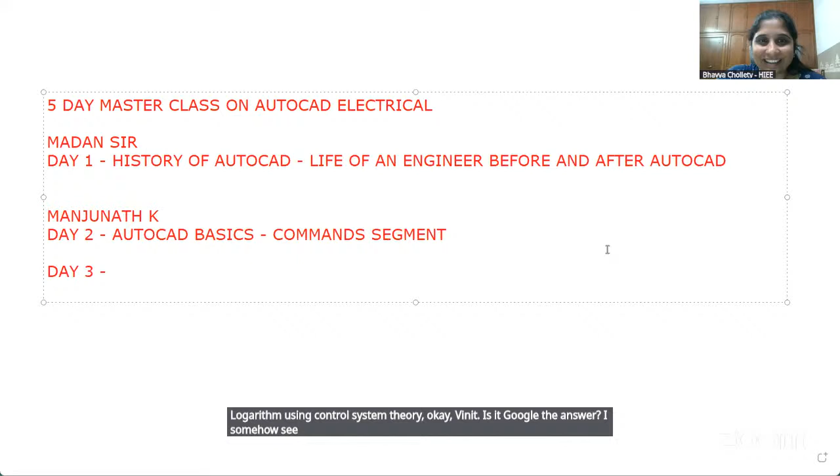Logarithm used in control system theory. Okay Vinith, is it a Googled answer? I somehow see it like that. Is it, Vinod, Yuvraj, is it? You can accept, no worries. Good, good, thanks for your honesty, Yuvraj.

Okay Yuvraj, good, a simplified symbolical representation of an electrical power system is SLD. Okay, Shabana says block diagrams are used to understand systems. Great, okay, great, right, super guys.

I'm getting a repeated answer from this. Okay, you try to get an answer from Google also, maybe Google will also give you a similar set of answers. Okay, Akash says it's a flow. Which is called flow, Akash. Vaishnavi says it also uses schematic for our practical manuals.

Okay, after we understood what SLD is and what a schematic is, we still have that confusion. So we'll try to understand how SLD is different from a schematic, how block diagram is different from SLD, and all those segments. In electrical, we will not generally refer to block diagrams, guys.

We will always try to talk in terms of SLDs, schematics, key line drawings, or layouts. Majorly we talk about this terminology in most electrical aspects. We will not purely talk about block diagrams. As somebody said, it's used in control system theory, yes. But to define the flow of the system, we use a block diagram, like for a power plant.

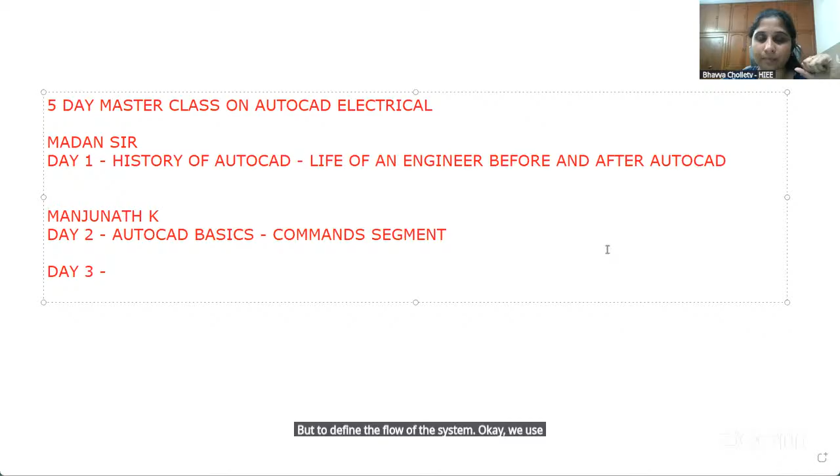Single line drawing, as most of you said, is surely meant to represent the respective electrical power system 100% using symbols. We notate each equipment with a certain symbol, and then that symbol along with specifications—meaning the rating of the equipment. We will not even miss a minute piece of equipment in the SLD, we make sure it is given, even the smallest terminal is considered in the SLD, guys.

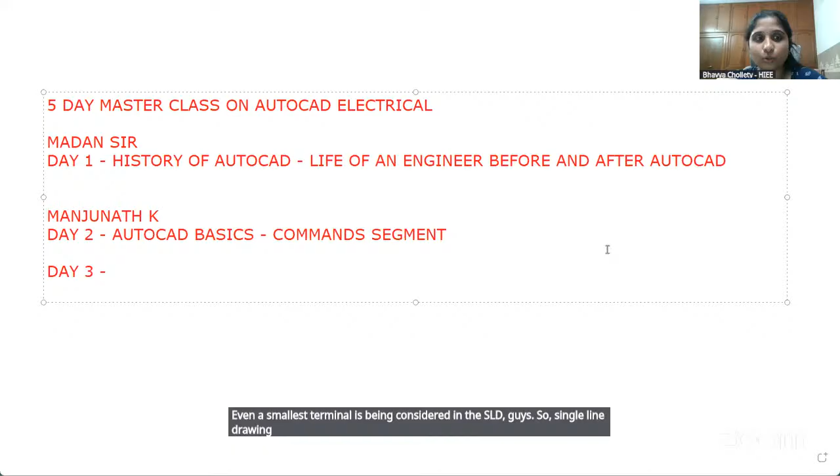So single line drawing is something where you look into it and understand how the system's power flow is being considered, from top or from bottom. And then you also look into the segment where you understand each and every equipment's rating individually. That is single line drawing. So I just defined it for you.

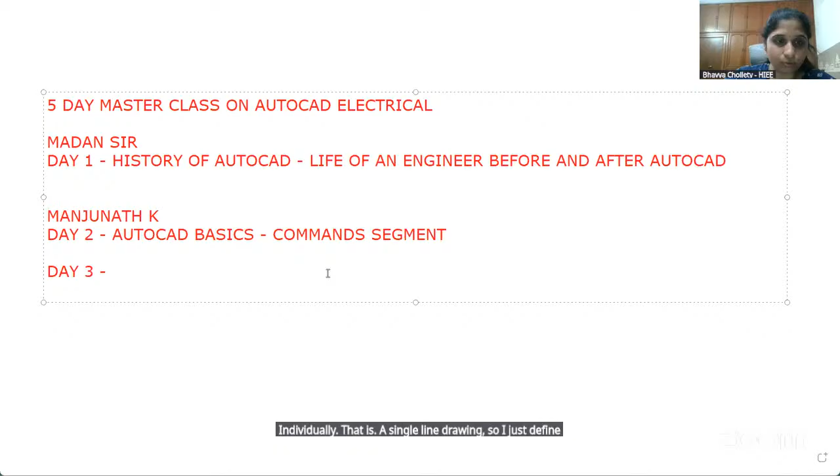So on the second day, we learned the single line drawing of a solar power plant of 200 kilowatt peak. And if you've observed the SLD already shared in the WhatsApp group that most of you have joined, you see that beside each equipment we write the cable designations, we write the inverter rating, we write the module rating, okay.

We try and write each circuit breaker's rating. In SLD, every equipment has its own rating, guys. So I define single line drawing: if you haven't mentioned the respective ratings of the equipment in the SLD, then it will not be a complete SLD. SLD is always complete only when you have considered the respective ratings of the equipment used or about to be used in the respective system.

Coming to your solar PV plant designing, if you have seen the power flow from the module till the evacuation, from the inverter till the connection to the grid point, the connectivity was shown by Manjunath. I think we all learned a great thing from it, talking about the symmetry.

In our first class, we tried to make you understand how AutoCAD is used, by drawing simple alphabets, because we already know how to draw an alphabet. Drawing the same thing in AutoCAD gives you a clear picture of how AutoCAD is processed and understood to draw elements we already know.

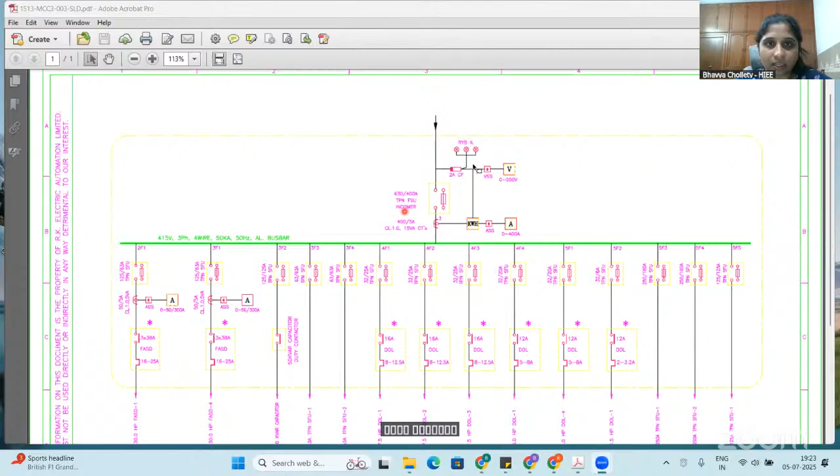So we are seeing a simple SLD, guys, where we'll understand how the system will be there. Now you can see there is an arrow mark on the top referring that the power flow is from top, and the connection is coming from top.

We will just see some SLDs with respect to my perspective, because I believe electrical engineering is perspective engineering. My current definition could be with respect to Ohm's law, your current definition could be with respect to charge, somebody's with respect to voltage, somebody's with respect to resistance. So it could differ in various ways and the fundamental is the same. I just wanted to tell you this because my session now is going to talk purely about schematics, and it is really at a high level.

I saw that most of you are pursuing candidates who have no idea about switchgear, or the connections of the equipment, or how the elements are being designed or equipment considered. So considering that criteria, I wanted to show you some basic fundamentals which Manjunath has already taught you at a good level.

I hope everybody is able to see the spotlight on my screen. So now we will see how the spotlight is being considered. Let us see, I have a bottom arrow and your respective supply is coming down, and then you can see there is an incomer FSU, TPN fuse unit, switch fuse unit, of 630 or 400 amperes, and then you can see there are indication lamps which are called ILS indication lamps - red, yellow, blue.

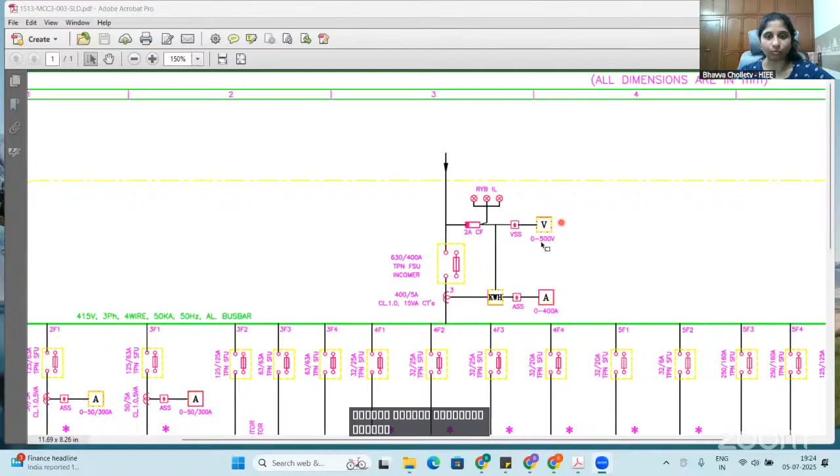Coming down, the supply that you're seeing here, the incoming supply, is being measured and also protected, guys. Every respective system in your houses will also have a breaker at first. So what we are doing is trying to understand how the system will be considered, and how these are being taken into criteria.

So you can see that the supply coming here is taking an input, and the input supply is first measured. In case there is a higher value, automatically this breaker will get tripped and the supply will not be given to the respective bus here. So before it goes to the bus, or to the supply of the equipment connectivity, you can see there is a CT and the respective power along with the current.

Both the kilowatt hour meter and power meter, which you call an energy meter - you look into it, where your current as well as your voltage are being measured. Both of them are measured and checked simultaneously to understand how much input is coming into your system. Now if you see it, there is a system here wherein you can see there is 415 volts, three phase, four wire, and 50 kA is the short circuit capacity.

50 hertz is a frequency. Aluminium bus bar is your respective bus bar. Okay, they have used an aluminium bus bar there. Now you can see that there are various loads connected. These are called feeders in general terminology, or you call them load. Now we generally draw a simple arrow mark that represents this like this.

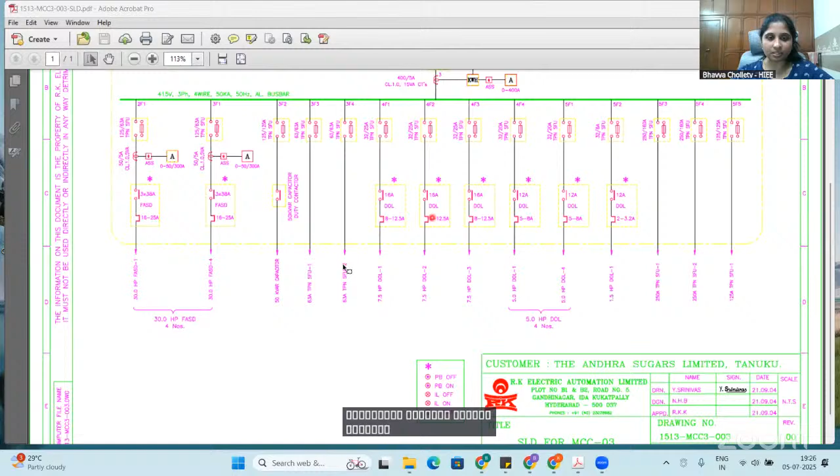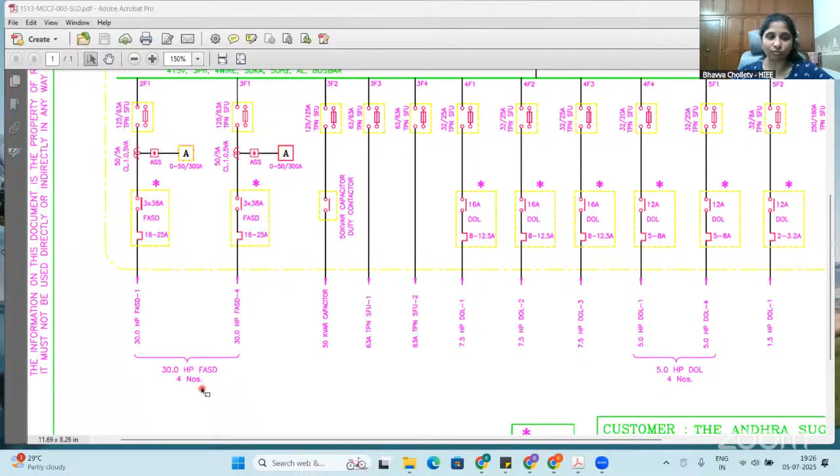So now when I'm looking into this, here you see that I have a supply given, and there are fully automated star delta starters, which you can see here, of 30 HP motors, 1 to 4. We have four numbers of fully automated starters. FASD represents fully automated star delta starters.

There are starters. Do you know what is a starter, guys? What is a starter?

What is between the energy meter? Those are voltage selector switch, Yuvraj. We call it a voltage selector switch and ampere selector switches, where we try to understand how these are connected.

Okay, I got an answer from Sai Krishna Maganti saying that a starter is used to limit the starting current. Why do you get this high inrush current, or what is meant by this limiting of starting current, guys? How do you define this?

To control the starting current. Yeah, but why should we control the starting current? Somebody answered with a point about 2 point starter and 3 point starter, very nice.

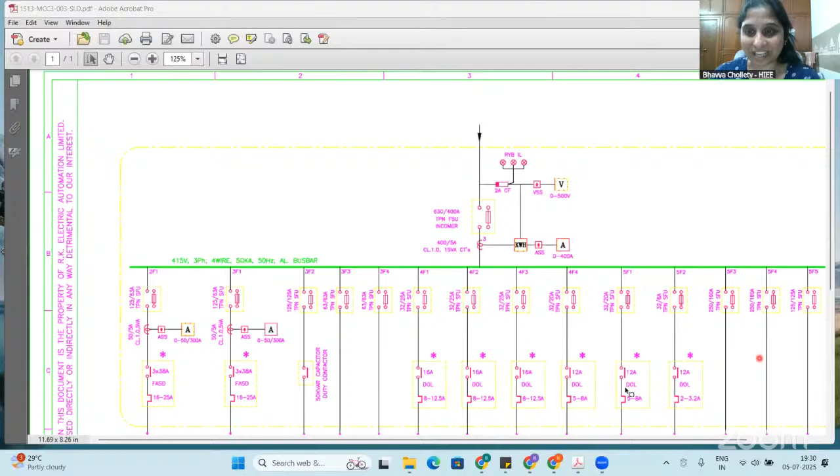As soon as you're on the bed and you got an alarm, and you woke up, how much time do you take to get up from the bed, put your leg down, sorry Pravin. 5 to 10 minutes, so very less time, yeah. 10 to 15 minutes, okay. Kritika says 5 minutes, maybe 10 minutes, okay. Good, so good, Snehit, I accept your point according to the usage of mobile, okay.

Now, the moment you wake up, just wake up from your sleep, not from your bed. No, you're not getting up from it, okay, sleep once again, okay. Good, Abhilash. Nice habit, okay. So now when you look into this, what is happening there?

You try to get up from the bed. The moment you're trying to give that energy to your body to wake up from sleep position to sitting position, you take the support of your hands or you get up from your bed. What is happening? Your body should pump in some more little energy to your body to get up.

You sit down and then after 1 hour you're trying to get up. Okay, your body is in one state, which is called a state of inertia. Inertia could be not only with respect to weight, it could be with respect to the state of the equipment.

Now your body is turned off, sorry, during sleep, and your motor is switched off when it is not in use. Suddenly when you start a motor, it should get that energy to actually run at a normal speed. Guys, you're all with me?

Lack of energy is inertia, to some extent, not completely, right? So now what is happening? People who didn't understand what is inertia and why motors have high starting current - I'm just trying to answer that simple question, guys. Why we require starters connects to that question, okay? So it's a tendency to change its motion. Correct, Prem, you're right. So what is happening?

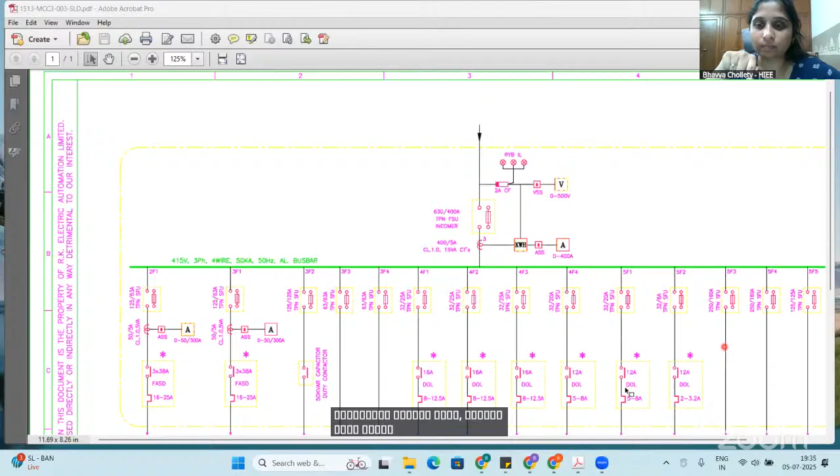Now the best example to understand the DOL starter is your pump motor in the house. Have you seen your pump motor? You will see one red button and one green button in the house. The bore pump motor that you see for water pumping from the groundwater - you'll have two push buttons. Those are called push buttons, the red and green ones. The green one is for on and the red one is to off. Correct? So that is basically a simple DOL starter, guys.

Very, very simple DOL starter. You can see here there's a push button and a DOL starter along with an OLR. This symbol represents an OLR in other standards. What Manjunath has shown you as part of OLR had two respective circles like this, as in switch opening and closing - that's an overload case. And now here, whatever you're seeing is just a rectangular, semi-rectangular wave like that.

So that case, this is also an OLR here, which you see where my spotlight is actually moving. You can see this is a 16 amp push button, and there's a fuse unit here. And then you can see it is being given to a DOL1. So likewise, this SLD is purely to supply, and it's a panel that is being given.

This is basically a simple panel SLD that you're observing here, which is a starter panel. You can see that I have four fully automated star delta starters and one capacitor bank of 50 kVAR, and then some SFU units used for supply considerations. And if you want to take some supply from the power, you can take it from these units.

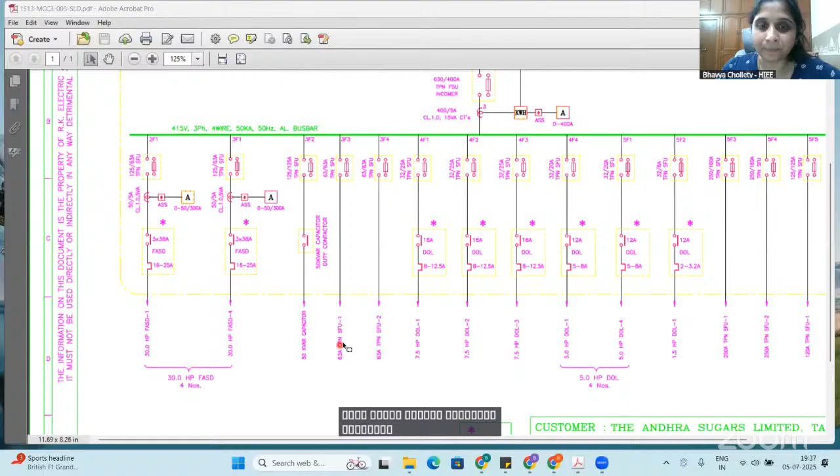And then you have your two, 1, 2, 3, 4, 5 different starters. We have again SFU units of this, 1, 2, 3, 4, 5. So I see 3 plus 4, 7, 8 DOL starters, 4 star delta starters, 1 capacitor bank, and 5 SFU units. Now this is a simple reading of an SLD, guys, wherein you can see each and every equipment has its current rating.

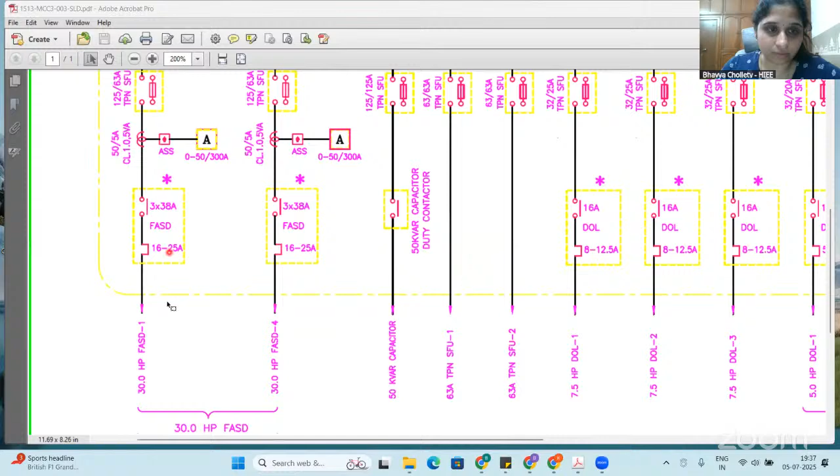125 by 63 amps, 50 by 5 amps, okay, 50 up to 300 amperes. You have a push button, you have a star delta starter, and then a capacitor bank. You see that every SLD will be mentioned with respect to the ratings. This is how the SLD is being mentioned. Now that was told on your day 3.

Okay, yes, and then we have let's go to something called a schematic.

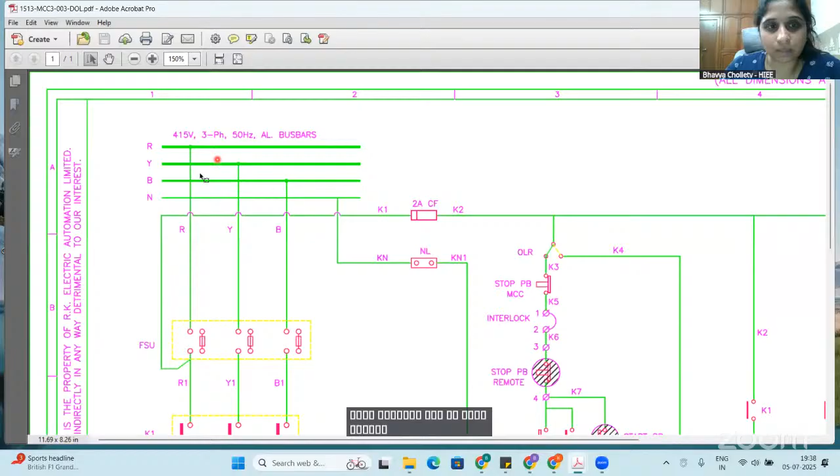So that's a DOL starter schematic, guys. You can see that here I have a four wire system, which is RYB neutral - I mean 3 phases, red, yellow, blue, and the neutral. So it's a 415 3-phase supply, but the system is a 4 wire system. And then from here, what you're doing is trying to take an input supply.

Guys, you're all with me? I'm trying to explain you a basic industry used DOL starter. Yeah, yes, great, good, super.

Thank you. Right, so now we are seeing that we have a fuse switch unit. FSU represents fuse switch unit, where you can see you will have a fuse connected.

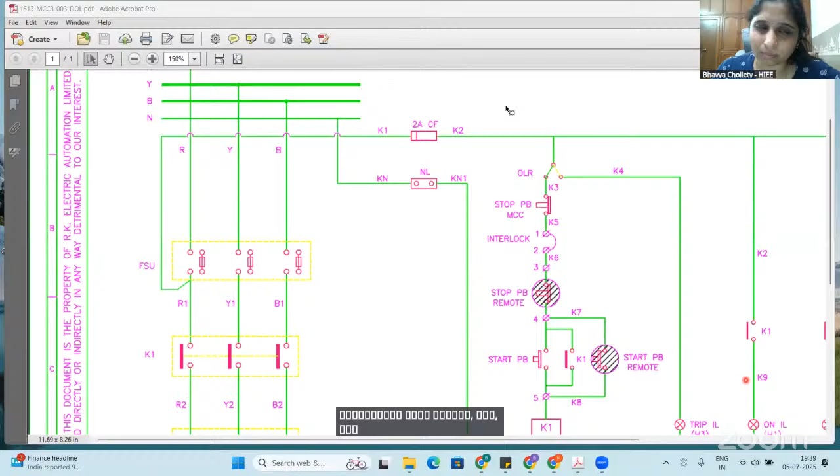We see most of it in movies where the villain tries to take off in serials. I would say the villain tries to take off the fuse out of the switch unit and the power goes off during any of the climax scenes and all. Then again the hero goes and puts it on, or somebody does that. I'm just giving you a good example where you can understand what is a switch fuse unit, guys. Yes, switch fuse unit, yeah, right.

Next we have a K1, which is a contactor, guys, and then we have an OLR, overload relay, right? And then we see one, two, three - these are terminals, guys, that are being connected to the motor. And here you see the motor terminals also.

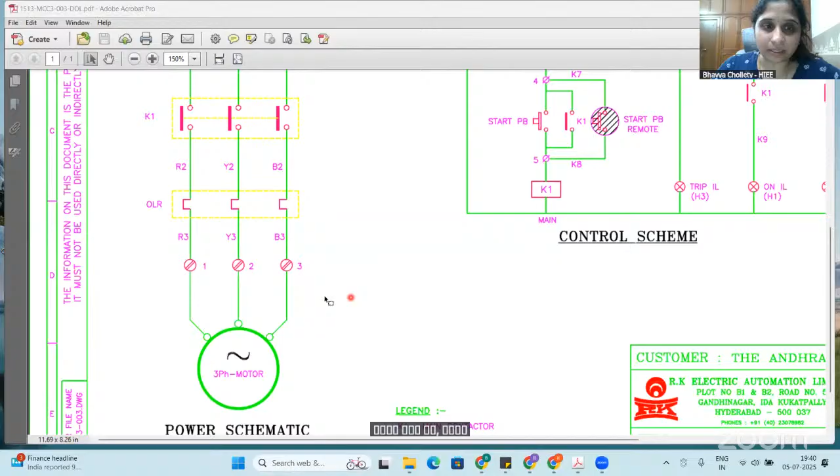We have given a power schematic. This is called the power circuit, power schematic of the respective connectivity, coming to this contactor. And then when you're looking into it, you can see that there is another supply given to the system, which is called the control schematic. You see this left part, I'll just put a rectangular box to understand - this part, the red box which I've just drawn, is purely the power schematic, guys. It is the power schematic.

And then the right part, which you're seeing here, is called the control schematic. It is power circuit and control circuit, right? So in the schematic, we'll have power schematic and the control scheme.

The control scheme is fully operated with respect to either single phase supply with respect to 230 volts. In some cases it will be 110 volts, which we take as another part, or sometimes it could be DC supply also for the control schematic.

Mostly it will be single phase supply taken from the main supply. As you can see from the respective supply here, I'm using my spotlight again. You can see my red arrow mark. From here, it is connected like this, and you can see that the supply is being given from one of the phases and the neutral.

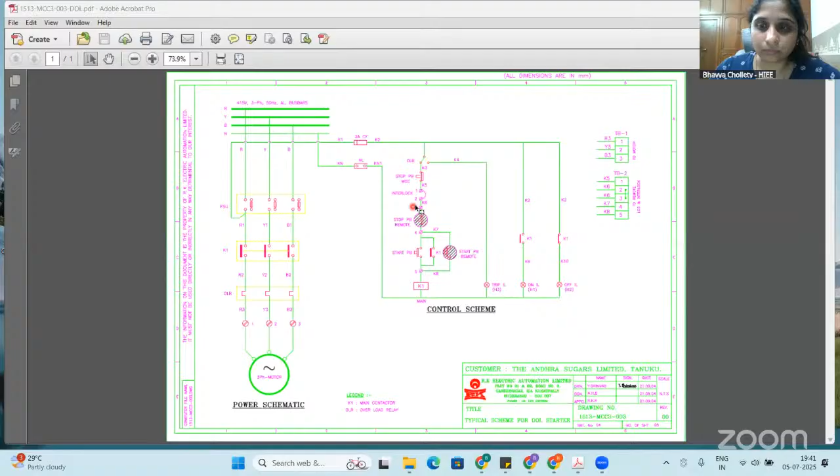Okay, whenever there is a consideration, right? Guys, are you all able to hear me? Is it Sagar's issue, and is everybody not able to hear?

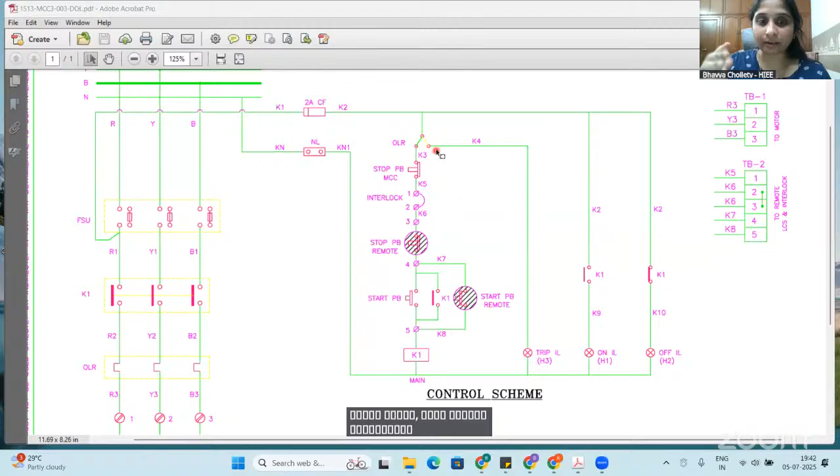Correct, Yuvraj, it is a single. Now in this case, it is not single pole double throw. Here the OLR will switch depending upon the current rating. Overload relay will sense, relay is something which senses the current.

So in that case, what happens? Your respective relay will sense the current, and if it is beyond the limit of whatever it is being rated, then your respective overload relay will trip directly. You can see the trip indication lamp.

Right, two-way switch. Right, Femina. And then we have the stop push button, which is NC, normally closed, because to supply the power flow.

So what I'll do is use an arrow mark to make you people understand in a better way, guys. From here, the supply comes in. It is going, and I see that there is no overload current, so the current is flowing like this. And then I see there is a stop push button that is connected, so the supply goes like this again to the bottom.

And then I see there's an interlock connected between the respective K1 and your push button consideration. And then from there, you can see that this is for future interlocking, guys. The interlock represents here for future interlock. In case in future you want to operate a motor with respect to, or one DOL starter with two different motors, in that case you use this future interlock consideration.

And then coming down, you see the stop push button, remote consideration if you want to connect it. These are remote, the shaded part is remote. That means one will be near to the respective motor and one will be in the remote location. You can connect the same motor pump in two different floors in the apartment for the pump consideration. Now that is called remote consideration.

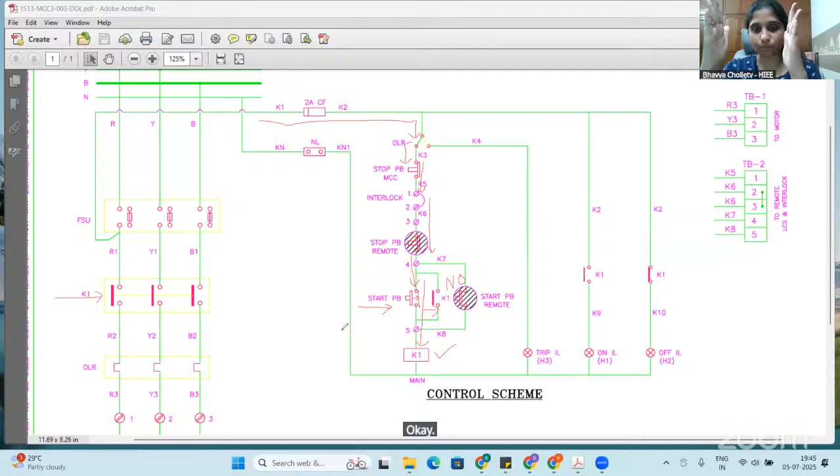Sorry, I'm going a little high end, guys. People who are not understanding, you can post your questions later. But please understand, it's just that I am pressing a button and there is some contact touching the respective terminals like this. Once I leave my push button, the contactor gets supplied, so the respective contact, whichever you're seeing here, becomes closed. The normally open system becomes closed, I'm just writing CL to understand as closed. And then you see that this contactor supply travels like this to the coil. And all the time until you disconnect the supply here, your DOL starter runs, your motor runs.

Did you all understand this control schematic? You can see the same contactor, whichever you're having here. If it is closed, then the DOL starter is on. If it is open, then the starter is off.

Please do not go with the respective real-time symbol indications on the screen, guys. Always the schematic is drawn in the off condition, and read in on condition with respect to the power supply, as just shown to you. Are you all understanding?

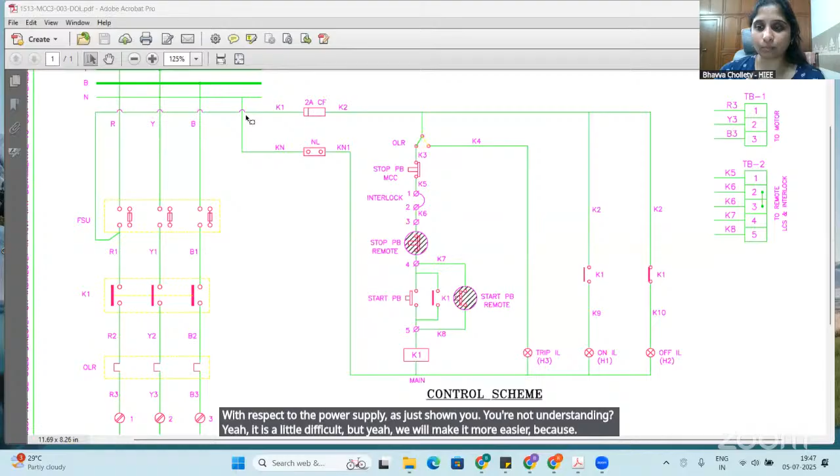Yeah, it is little difficult, but we will make it more easier because you need to take more considerations here. Yes, Abdul, you're right. You have considered that.

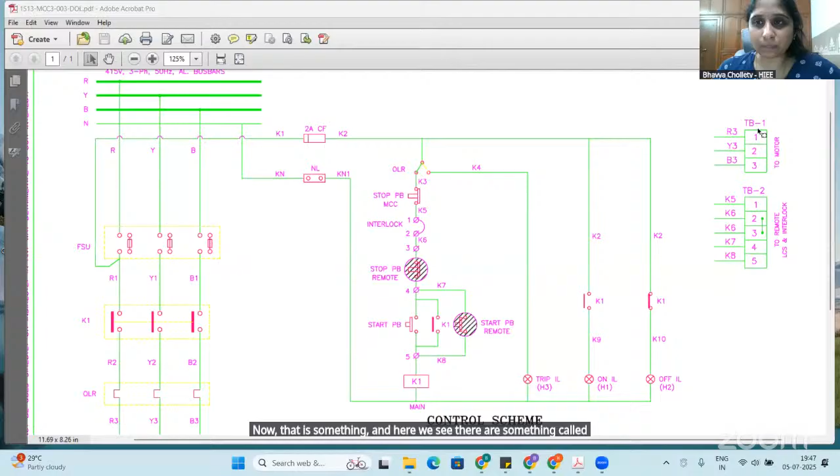Now that is something, and here we see there is something called TB, which represents terminal block, TB1, TB2. Why is ma'am speaking so much about this schematic today, which is little high-end? I know, but my intention in showing you this is to make you understand the difference between SLD in a power circuit and a control schematic, guys.

So far you guys have drawn wonderfully, talking about SLD just in AutoCAD, and then you have spoken about the respective control schematics, right? Yes. But I just want to give you some info about how the control schematic is being considered, because the software that I'm going to use right now needs all these pin connections, guys.

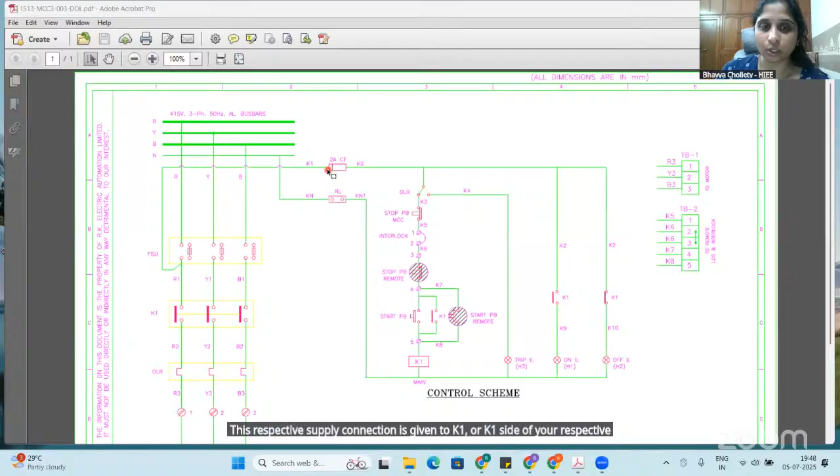Now, you see that I am very much particular about at what point actually my connection is being given. This respective supply connection is given to K1 side of your respective control fuse, 2 amperes, and K2 is connected to the OLR point.

Now what is K1? What is K2? K4? What is this K2 again? K9, K10. Can you see this?

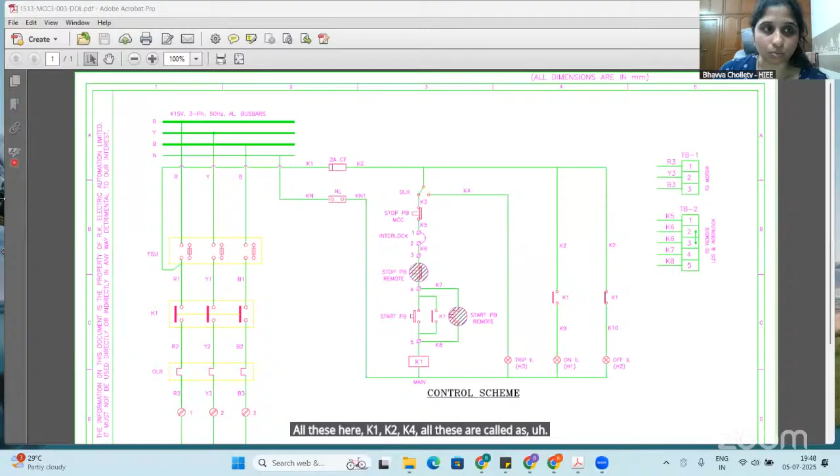All these here, K1, K2, K4, all these are called ferrule numberings, guys. What do I refer them as? Ferrule numbering. I talk of it as ferrule numbering, guys.

That is nothing but when a connection is given, you have to tell me - you can't say, ma'am, control fuse ke connection ke side. You can't tell that. You should always talk about the fuse point at which it is being connected. So every equipment will have a notation for its respective terminals, connectivity points, and every connection has a label to it, guys. That label is nothing but the ferrule number. Are you all with me, guys?

Did we understand this? We understood this? Yes, can I get a yes please? Yes guys, everybody please. Are we all clear? Great, great, good. I could see there are more than 160 participants, and I only get a few yeses. Great, thanks Tushar, thank you Roshan, thanks Vamshi, great, great, good.

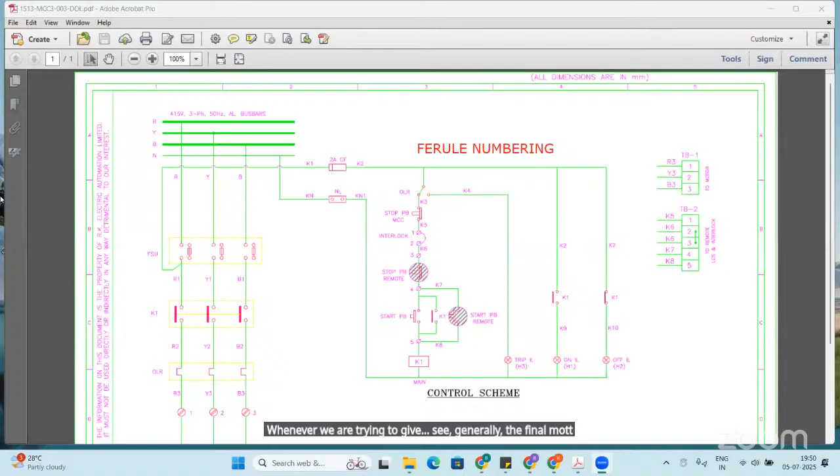Super, guys. So now this is ferrule numbering, which we just discussed, and we'll also talk about equipment consideration. Generally the final motto is that most of you have gone to apartments, or we stay in apartments, right? Most of us stay in apartments, correct?

Have you seen one big cement-shaded, or any little gray-shaded box with all lights in it and with partitions in it? Have you ever seen it? What do you call that, guys? Okay, you call it a box - good, Abdul, it's called a panel, it's called panel board. Super. Sunita wants a picture.

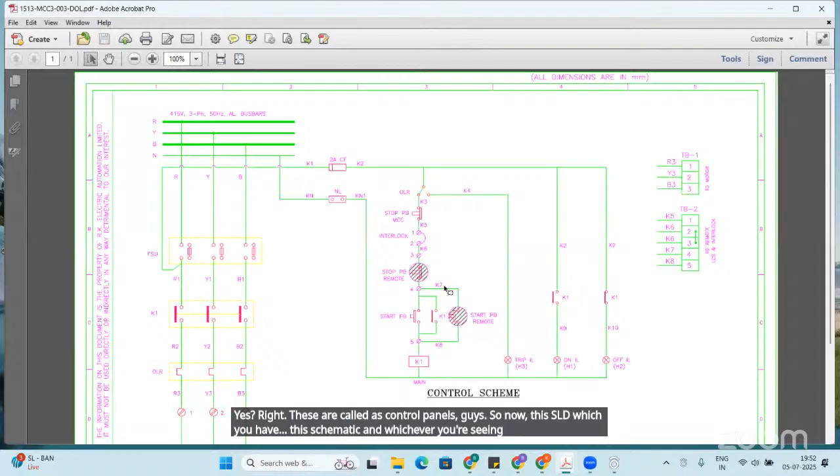Yes. Right, these are called control panels, guys. So now this SLD which you have, this schematic and whichever you're seeing, will be like that only. Now, whatever the SLD we just saw.

Just give me a moment. This SLD which you're seeing will finally turn into a control panel. We have just discussed the one respective DOL starter, maybe all the DOL starters will be in the same fashion here. We also have star delta starter, but I won't confuse you too much with technicality, considering the audience present here. So that's the single line drawing, and then we've seen a star delta starter, sorry, a DOL starter.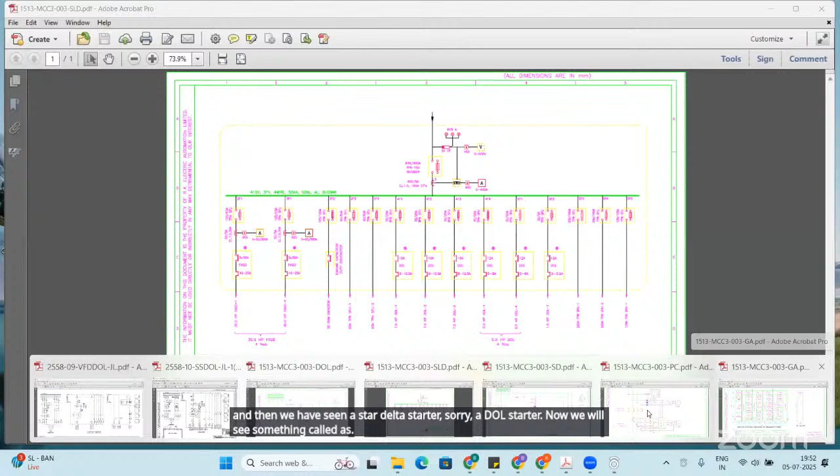Now we will see something called GA drawing. Can you all see it, guys? Does it look similar to the ones we just saw in the Google image? Yes. So this is also being drawn in AutoCAD, and there are many other softwares to draw this too. This is simply the same respective one - you can see a voltmeter and ammeter.

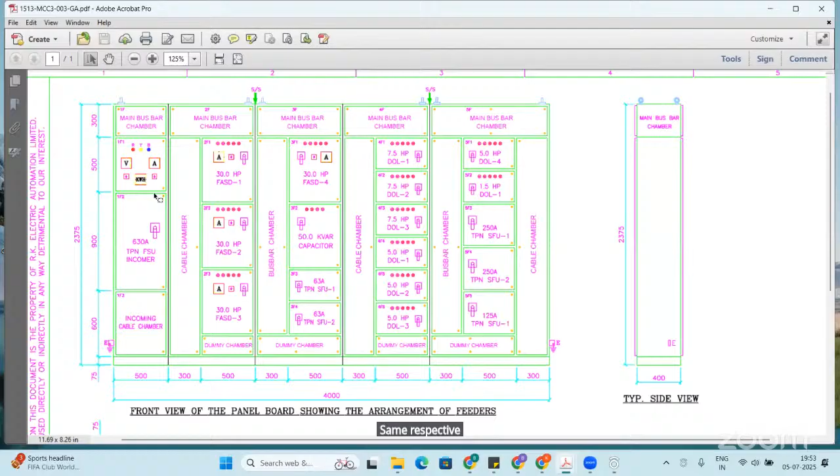I will just try to relate it, guys. Give me a moment. Okay, I'll use this thing. You can see two screens of mine. Right, so you can see there's a supply RYB here on the left using my spotlight, RYB here on the left, and on the right too you can see RYB.

And then you can see the 630, 400 amperes breaker - you can see it here. Sorry, it's a fuse unit. And then you have a cable incoming from the bottom. Now coming to this.

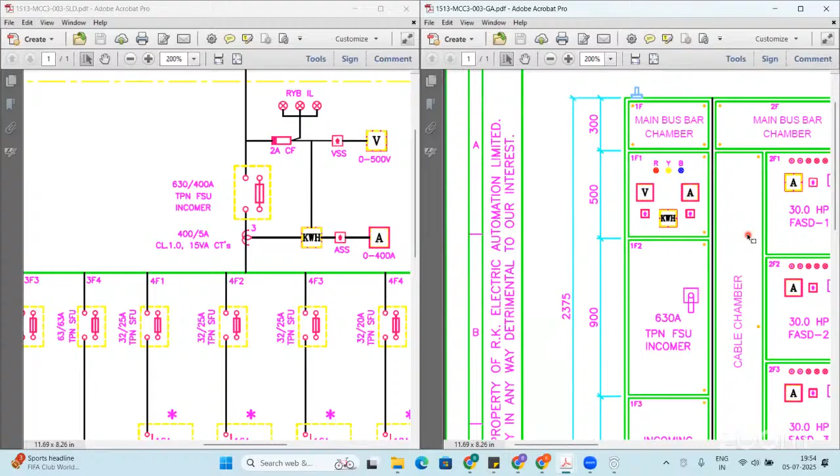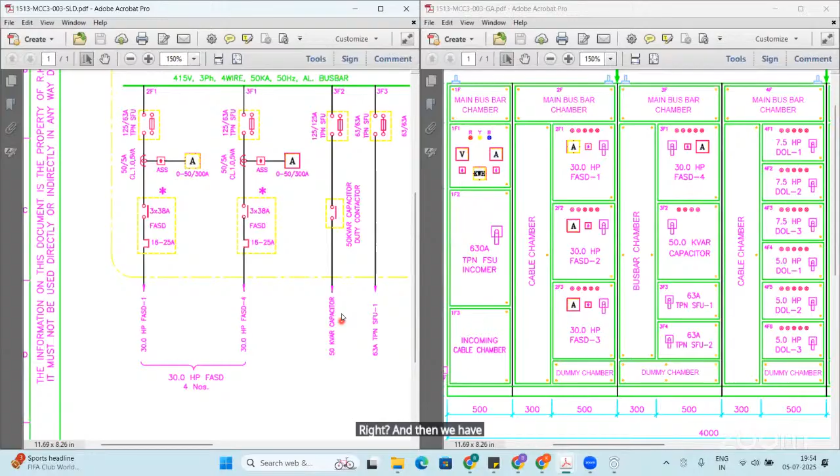Then you can see there are four star delta starters, 30 HP, 1, 2, 3, and 4, which you can see here. Can you see it? Yeah. So this is this, and then you also have this here, right? And then we have a 50 kVAR capacitor bank, and its respective capacitor bank has been designed here.

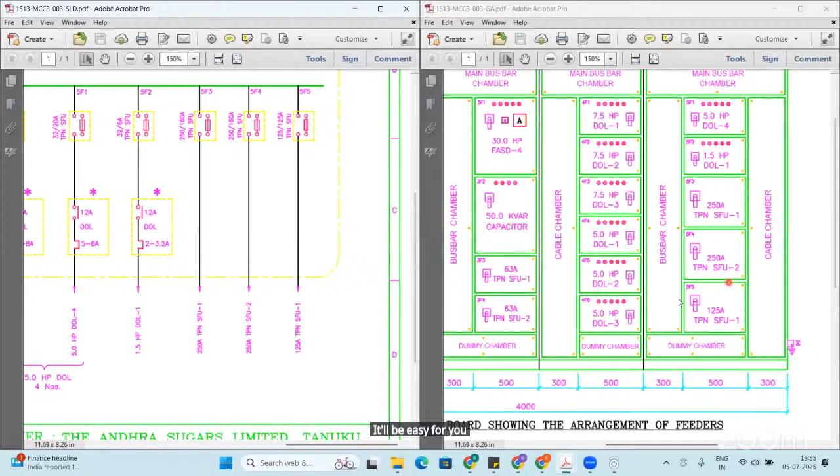And then you have your SFU 1 and 2 - so we have given two respective vacant SFU switch cabinets to that segment. And then we have DOL starters, total seven - so one, two, three, and then again other 5 HP motors, one, two, three, four. Then we have 1.5 HP DOL starter one, and then two 250 amperes and 125 amperes SFU units here, which you can see on the left side. Please observe my spotlight, guys, it will be easy for you to connect with the respective GA and the SLD.

Likewise, this is how you draw your GA drawing with respect to your SLD in AutoCAD. Now this GA drawing which you're seeing here is fully to scale, guys. You can see the dimensions mentioned here - this is to the scale. The GA drawing has been done to scale, and you can see even the base plate details and connectivities given very detailed and understandable.

Are we all clear so far? Can I get a yes? Great, good, guys. Others? Lavanya, Rahul, Prem. Okay, thank you, Jay. Thank you, Shil. Thank you, thank you, great.

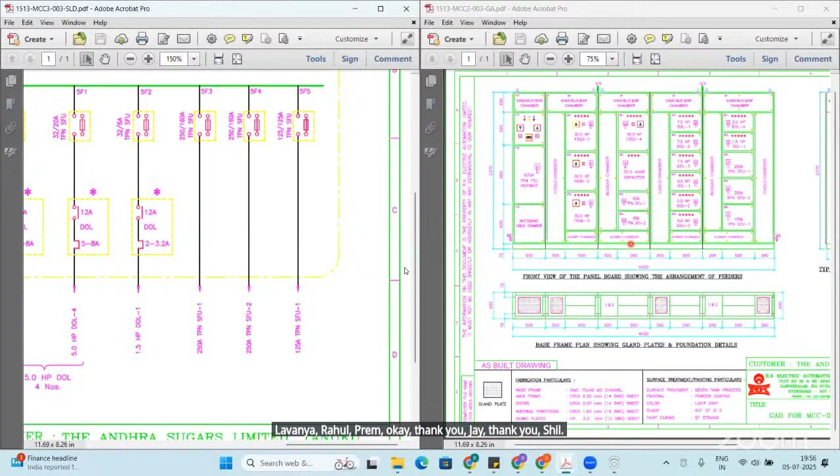Super, guys. Now what we will do is we will try and draw the scheme that Manjunath drew yesterday. How much time did you guys take, if anybody has tried to draw it? If you tried with AutoCAD with the SLDs or schematics that we've given, what is the approximate time you guys took to draw it in AutoCAD?

3 hours, okay great Yuvraj. 1 hour, good Bhanu. Any others who've tried? 1.5 hour, good good Vinod. 3 hours, okay, good. 30 minutes, okay, 2 hours. I've taken 10 hours, okay Jay.

Okay super, guys, super, it depends on practice. Good, Sunita. Yeah, but I know most of you are freshers, so I can consider your 2 hours, 3 hours, and 1.5 hour considerations. Yeah, good. 4 hours, good Hemalata. Snehit, oh super. 2 hours, okay, 3.5 hours, 2 hours. Guys, you've got a lot of patience, and I'm glad you're stepping ahead and understanding how the application moves on and works. I am really glad you guys have practiced it, and if you've just put a name down, that's okay too, you will practice someday. But yeah, super, so 3 hours, 4 hours, yes.

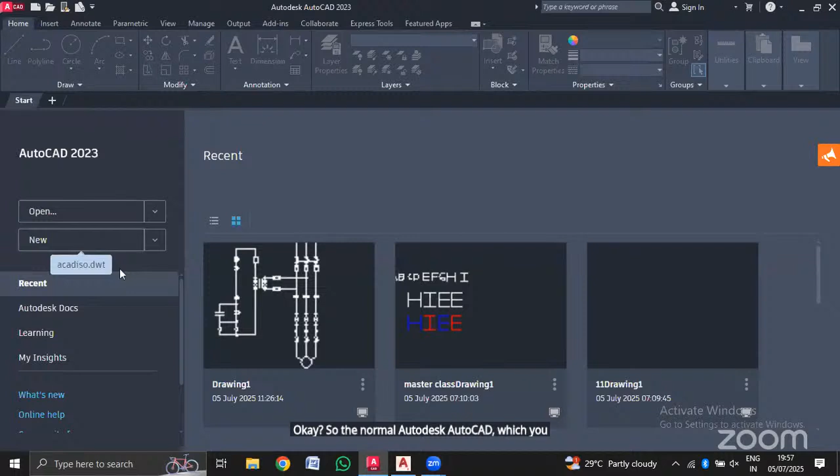So now there is another software. Okay, I'll just share another screen, please wait for a moment. So the normal Autodesk AutoCAD, which you have seen, which Manjunath has shown you, which he drew yesterday - we'll take this only into criteria.

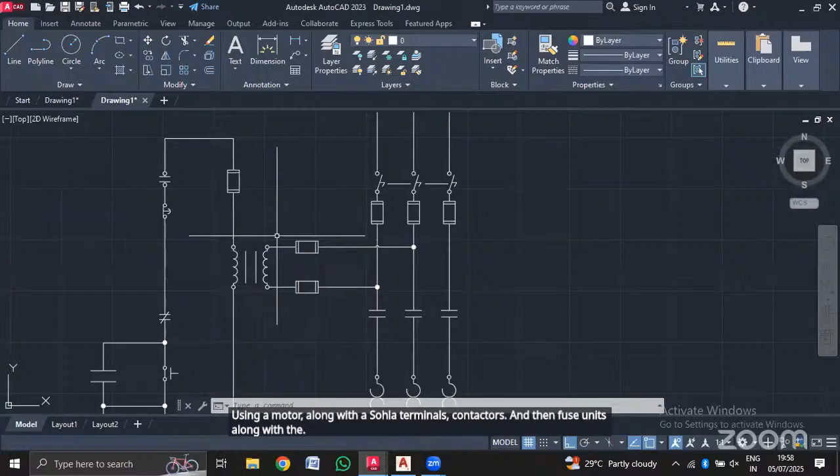Okay, that's drawing one, I'll come back to this. Right, so this is super. He has just drawn a similar DOL starter here using a motor along with OLR terminals, contactors, and fuse units, along with a control transformer with respect to supply to its coil and other segments. He has not given any tagging.

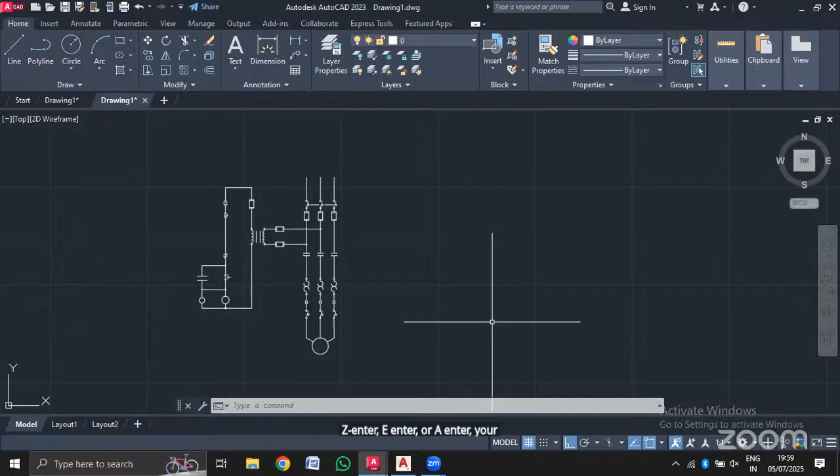That's okay, we couldn't have that time yesterday to work on that. Yes, it takes more time to find the drawing. I lost it by zooming in or out. Z enter, E enter, or A enter, Yuvraj. There's a shortcut. Zoom, Z represents zoom. Then you press A, where you will see the drawing exactly where it is there.

This is drawn with us in yesterday's session. Right, okay, Z enter and A enter. I'm somewhere here, just pressing Z enter and then A enter, so whatever I've drawn, you will see all the drawing that is being drawn on my model space.

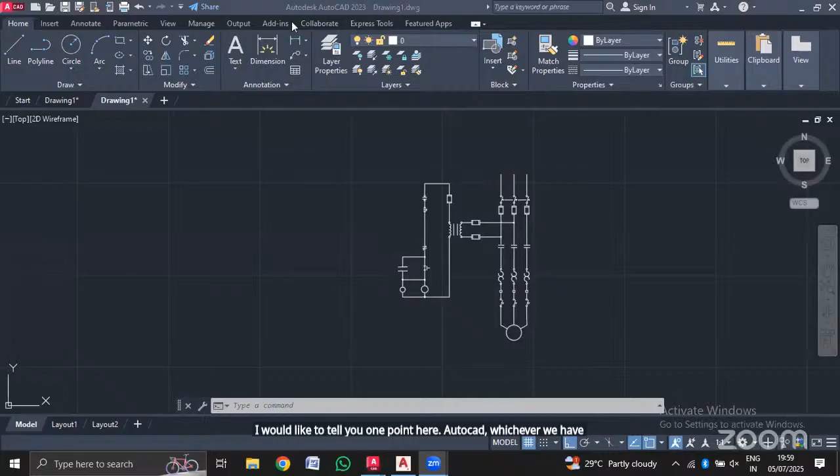Now this drawing which you have drawn, this is just in AutoCAD, guys. I would like to tell you one point here. AutoCAD, whichever we have used so far, is a generic AutoCAD designed for all set of engineers, guys. The generic software is designed for architects, civil engineers, mechanical engineers, electrical engineers, electronics engineers. There may also be designers and others who use it.

So here the commands that we're looking at are a generic software, guys. But AutoCAD, after so many years, has launched AutoCAD Electrical, from the year 2015, I guess, 15 plus. And where you can see your AutoCAD Electrical, AutoCAD has launched separately their own relevant system applications.

Architects have their own software, the normal one being used by civil. Mechanical, you have separately a mechanical one. Electrical, you have AutoCAD Electrical. There's another one with respect to electronics also, where they design their PCBs and all those segments. So there are various separate segments in AutoCAD that are being used, guys.

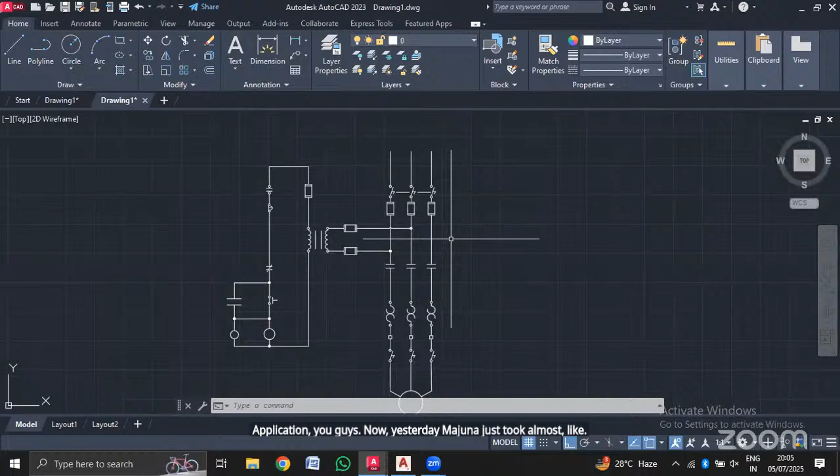Let us go back to the application because most of you are vexed with what I've taught so far. Now, yesterday Manjunath took almost 1 hour 45 minutes to discuss only this respective schematic. So now we will try and draw it in 10 minutes.

Shall we? So there is another application called AutoCAD Electrical, which you can see here on my screen. The look and feel of AutoCAD Electrical is exactly like your normal AutoCAD, but we will also see how it is different.

You can see that your respective home and all those are same, but here your electrical CAD, or ECAD, has different sets. Apart from the home consideration, most of the project schematic panel reports, import export data, and electromechanical are different in case of AutoCAD Electrical.

Not only schematic, it is also with respect to your project. You have to define a project in this case where you will create a project for the list of sheets, because you will create a panel and a schematic in ECAD. Then we have schematic, where you will create and generate a building schema.

And then we have panel, where you will talk about the panel design as in GA consideration. Then we have reports to generate the reports. AutoCAD Electrical is a sort of simulation software, guys, because there is an option called electrical audit, where you will check whether connections are proper or not.

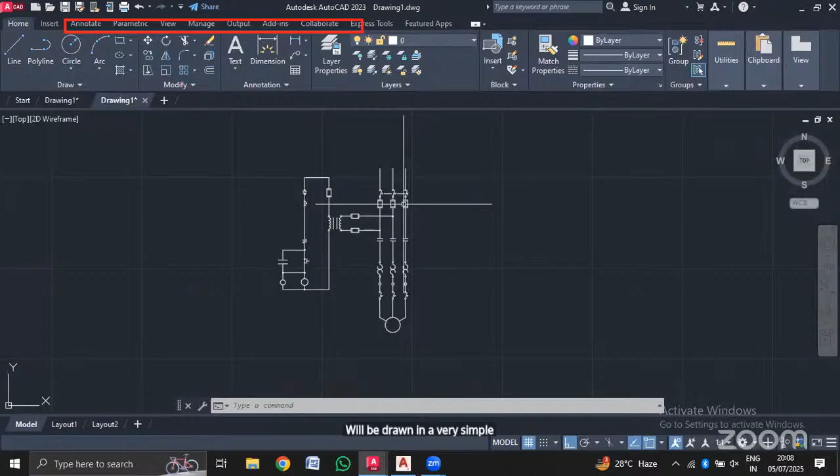So quickly, I'll go back to schematic to show you how this respective drawing will be drawn in a very simple fashion. Let us see how it has been drawn. Let me go back to AutoCAD Electrical.

So I'll choose a wire. Instead of it, I'll choose a bus. So what I'll do, I'll draw a horizontal line and then click an empty space. I'm not going to talk about that in detail, I just wanted to give you an understanding about how AutoCAD Electrical works and how these applications make your work easier.

In AutoCAD, you cannot identify a mistake by just drawing it. Right now I'll click on three numbers, and then click on empty space in the horizontal. Now I'll click on this thing. Let me draw it. Okay, I'm just entering.

I'll just give you a very basic example of how ECAD and then your normal CAD runs. In case of AutoCAD, if I draw a line, what's the command for line command, guys? L enter. Now you see that if I have to cross one line, a horizontal line with a vertical line, I'll take a circle. What's the command for circle? What's the command for trim?

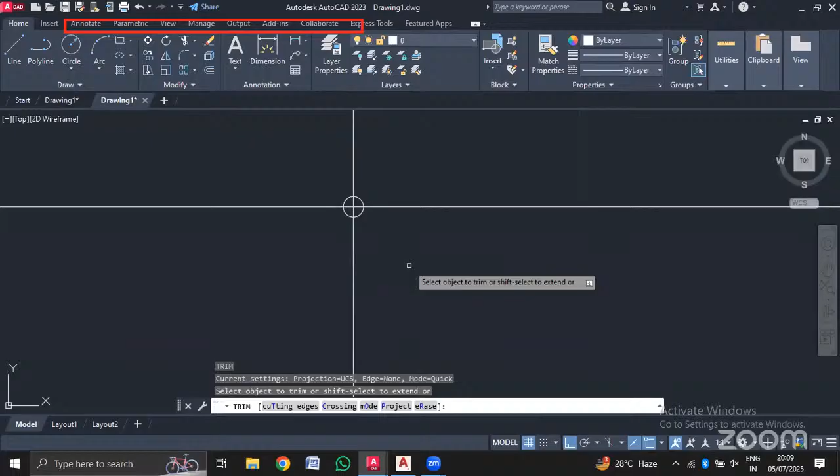This is called a jumper, guys. In the electrical segment, when we have two respective cross lines, we try to put a jumper there. Now I took almost 2 minutes to draw it.

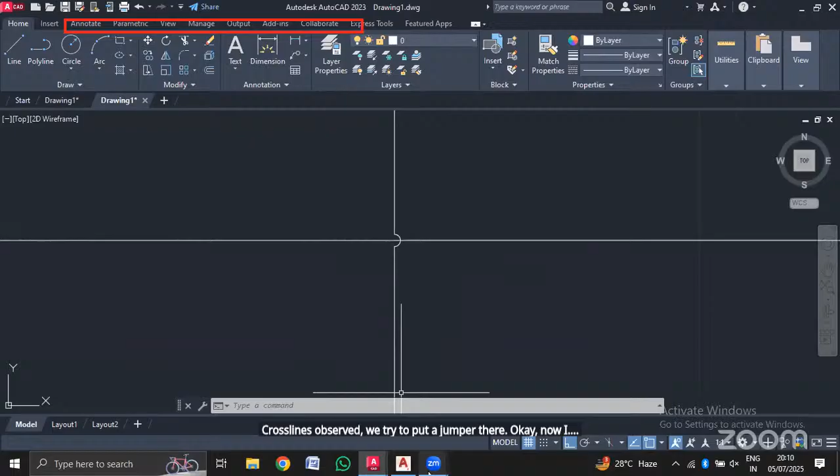In case of AutoCAD Electrical, if I have a wire drawn like this, and then again I'm drawing a vertical wire like this, using a wire, guys, now you see that automatically there will be a jumper. So you will not have to look into very miniature things in AutoCAD Electrical, guys. It will make sure that it is being done by default.

Now if I have to take one more line like this, if I'm having a line and then I have to draw a line like this, see, in AutoCAD Electrical, you can draw a normal CAD also. I'm just drawing a line. Give me a moment, using my ortho on. Okay, function F8, L enter.

Okay, so guys, somehow I'll do it here. In case of your line, I'll just use this.

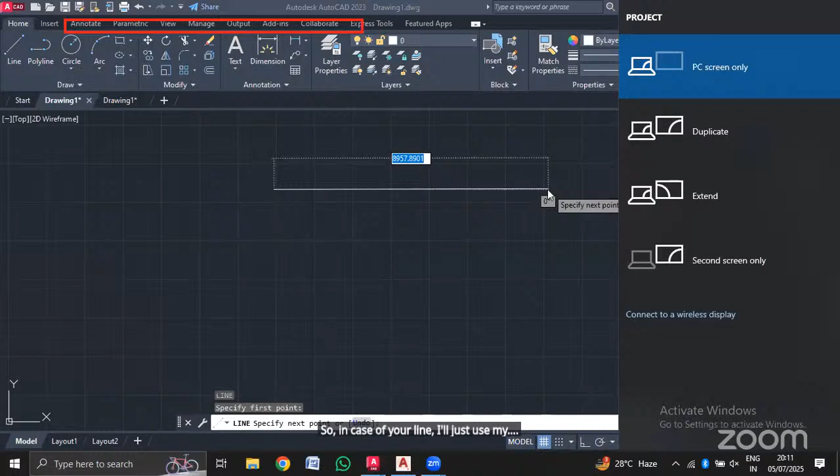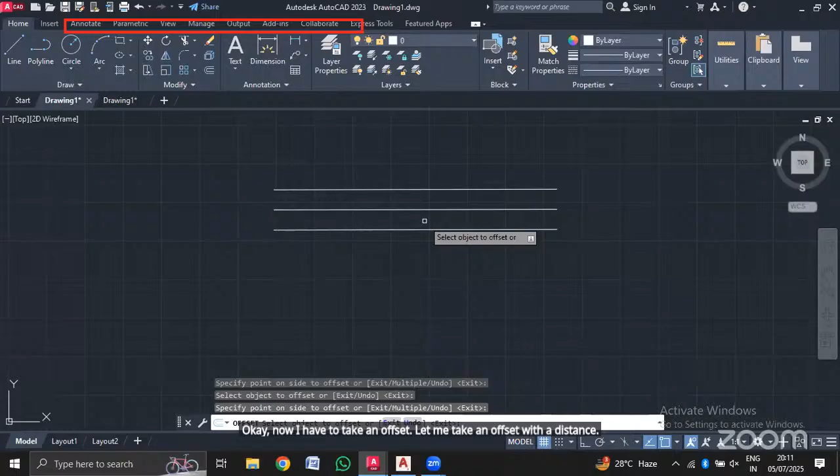Okay, now I have to take an offset. Let me take an offset with a distance. And I have to draw a vertical line connecting to this respective point. I'm drawing it.

Like this, and then you have to always use a jumper. Then here you have to use a donut command to show that there's a connection between given inner diameter 0, outer diameter 1. Place it here. You can observe that there is a donut connected here like this.

Okay, this is all in normal CAD, guys. When you are looking into AutoCAD Electrical, let me show you that.

You can draw a wire like this. And then you want to use another wire. I'll connect it irrespective of the distance considered, but I'll just draw it. This is one way of drawing individually a connection, guys.

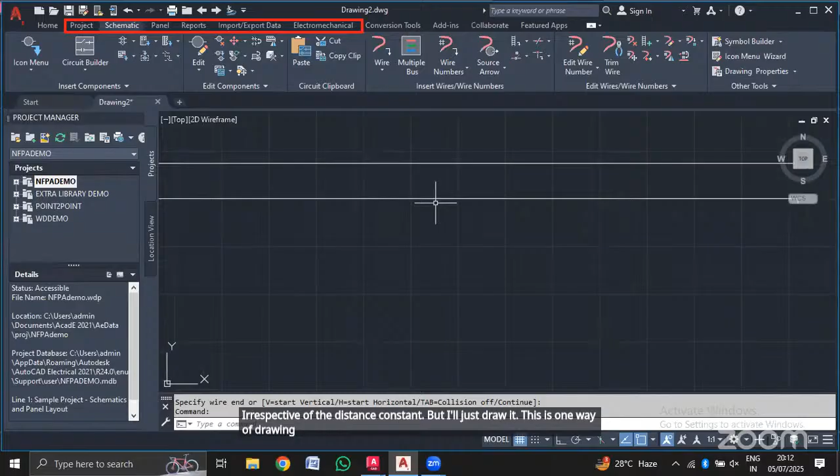But if you want to draw a multiple bus, I want a horizontal multiple bus, in empty space, and then the number of wires I want are 3. Now we have seen a 4-wire system.

Let's click 4 and then select that. Click OK and then start point. I'm sorry, you can see that.

Zoom in and I'll draw it again. Multi-bus, okay, 4, click OK. Start point, and then can you all see it, guys? I'll just stop it here.

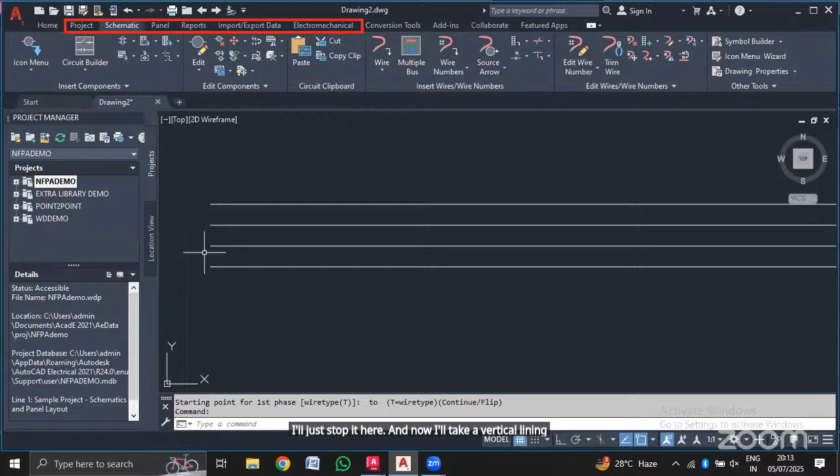And now I'll take a vertical lining, guys. The spacing between them is 1. Let me take a vertical lining. I'll take empty space to another bus, and then again I'm taking 4 into consideration. Start from here. Can you all see it?

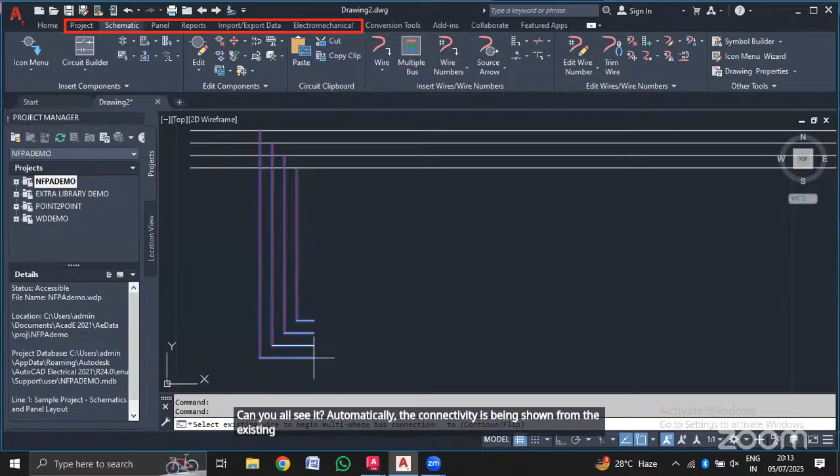Automatically the connectivity is being shown from the existing connection, guys. Yes, we do have it.

For every respective command, you have to use AE in between—AutoCAD Electrical, AEW. AEW is AutoCAD Electrical Wire. I'm not showing you the commands currently, it takes really a lot of time to understand the application and commands. Again, we need a separate session on it, but we just wanted to show you how the connectivity is

being given. Now you can see automatically the connectivity is being seen and the jumpers are being formed, guys. Please observe the difference. I'll just take 1 minute of time just to show you how components will

be there. There's something called an icon menu here. Now if I want to use a push button or I want to use a fuse unit, I've opened this and currently we are using an American standard NFPA,

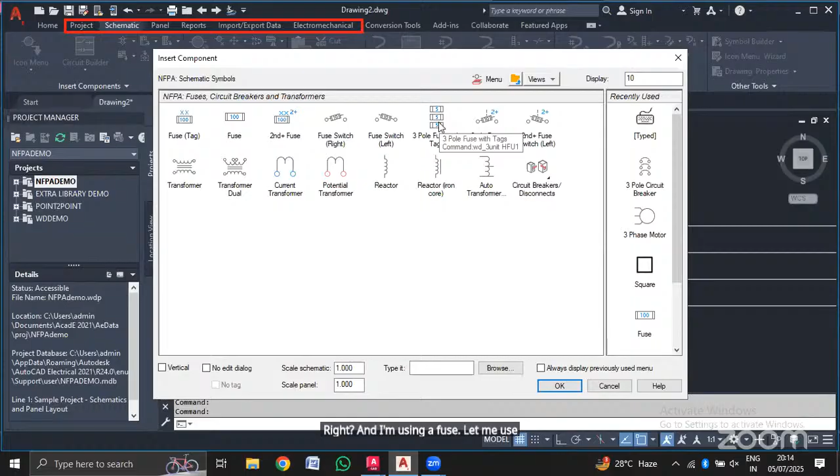right? And I'm using a fuse. Let me use a 3-pole fuse with tags. Click it, place it here. Down, I click it. Then automatically you give a connection line 1 as in 1,

or else I can give you directly here 1. So automatically this is all one fuse unit. Or if you want to separate it individually, you can give a name.

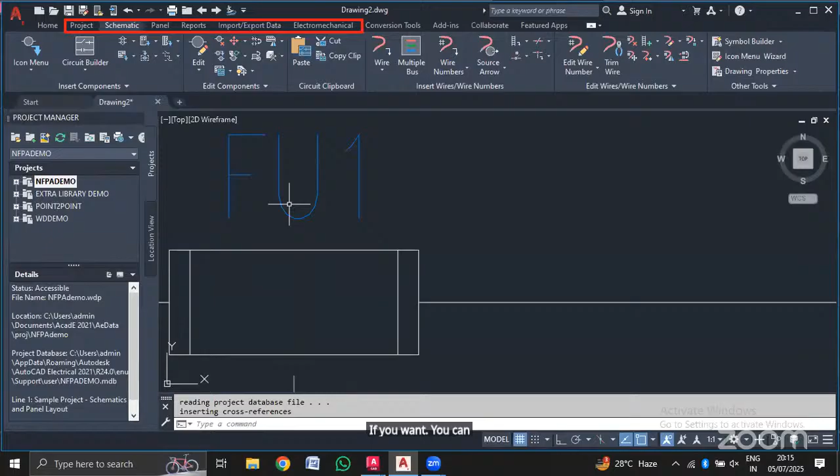Now you can see the equipment name is FU1. You can give a different tag also. Now you can see that I'll use a breaker here.

Let me click the icon menu again and go back to the breakers. Sorry, I've used it, got double clicked. Going back to icon menu, click on this.

You see separate breakers, you place and use the 3-pole breaker and I'll connect it here, and it's down.

And we are using only one breaker, 3-pole breaker, so it is CB1. All connected together.

Now if I want to use a—what else we can use? We can use a contactor, of course, or we'll use a push button.

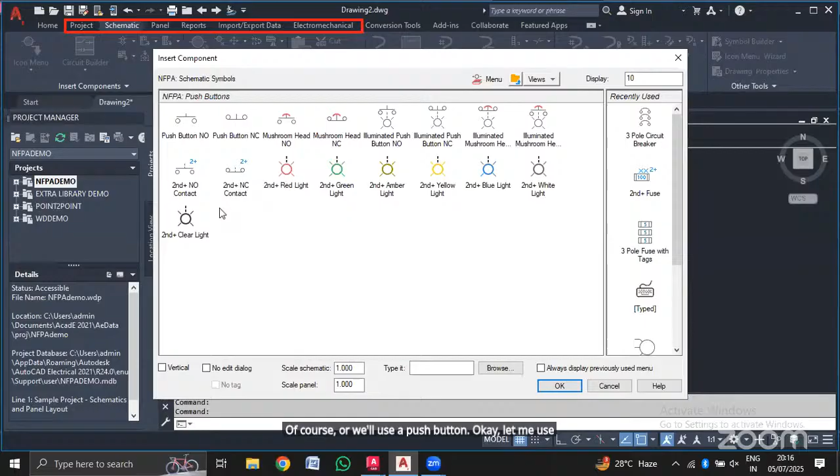Let me use an NO push button, placing it here to this. Okay, PB1. Like this.

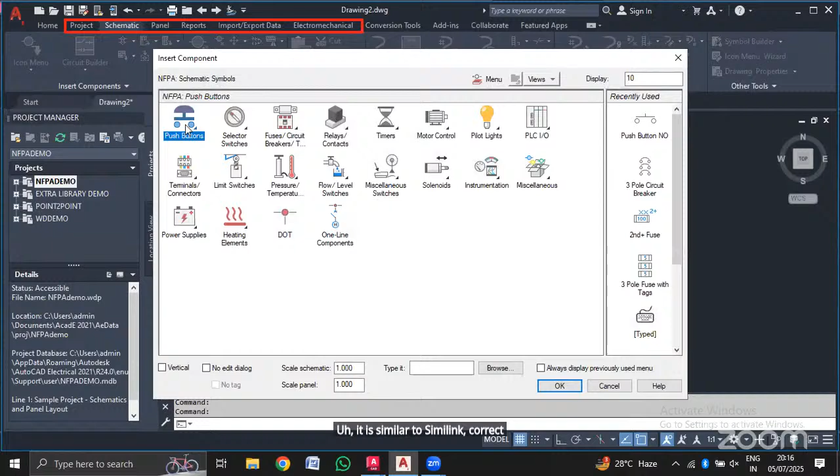It's just that drag and drop, select the icon and place it into your respective position, guys. It is similar to Simulink, correct. But the UI would be similar to your respective Simulink, but it would not be the same as Simulink because you are working on the respective electrical

considerations, right, and you're designing a scheme here. So something like this. Now if I want to connect a motor to this point, let me go to the icon menu. You will see a motor circuit option, motor control option, and you want a 3-phase motor here. Choose it, place it on the center, guys.

Okay, and now I want to write this as motor 1, and then item 1, count 1.

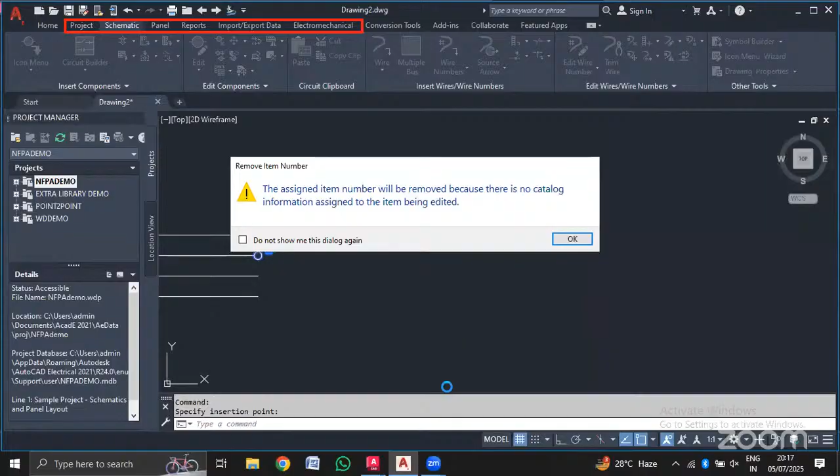Click OK. Okay, so now you can see automatically the motor has been connected to the 3 respective terminals. Can you all see it?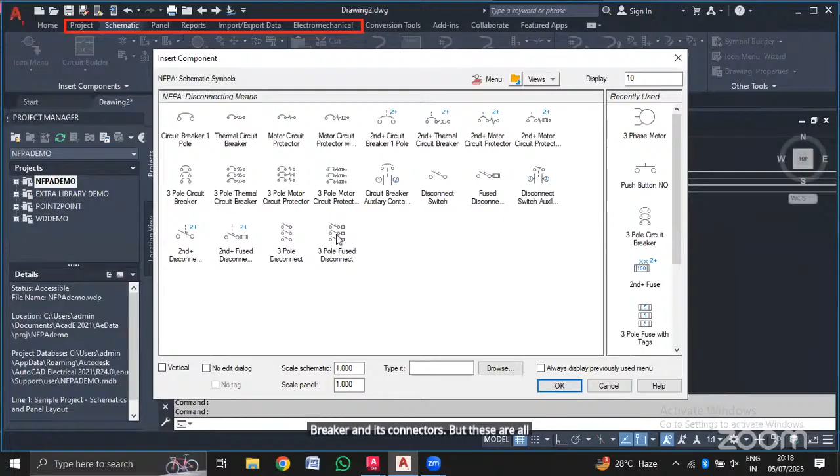Okay, did we all understand how this is being done guys? So it's easy, and then we can see almost most of it. If you want to add an overload relay, we can add an overload relay too. You can see there's an option called relays and contacts. Breaker and disconnectors - these are all breakers. Let's go back to these units.

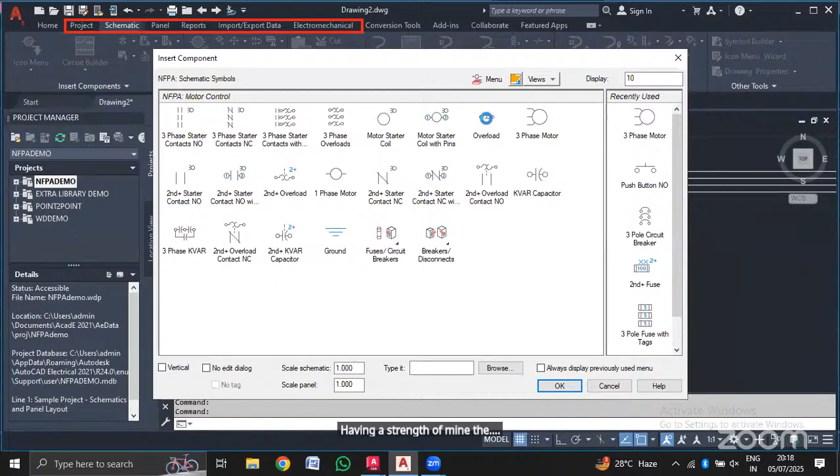I'm just trying to find the overload relay. That's here, so we'll place it here for timing, just to show you people - overload relay 1. Can you all see it, guys?

Yesterday we used 2 circle commands, 1 mirror command, and we also worked on the various terminals and circle commands, and then we used the trim command to work on the various segments that are being considered, right? Yes or no?

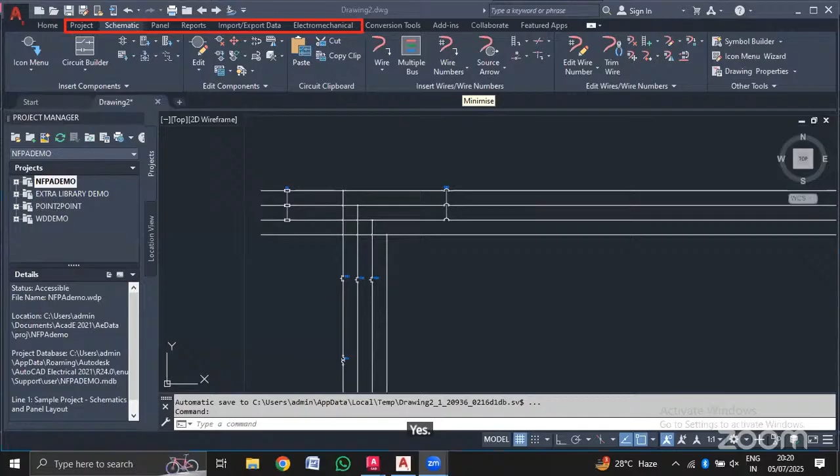You can install it, Vamshi Krishna. You can use it, you can even install AutoCAD. There's an AutoCAD mobile application available that can be installed, which is available for Apple versions also.

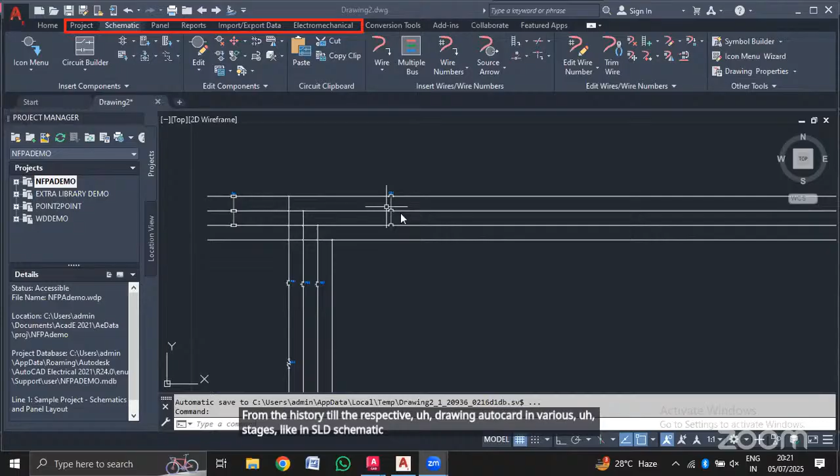So with this, we have understood, and as in my starting statement, we have discussed about AutoCAD from the history till the respective AutoCAD, drawing AutoCAD in various stages like an SLD schematic, and then we have seen how AutoCAD electrical is also being used to make you guys understand the respective pin numbers and ferrule numbers.

We were talking about wire numbers, so let me click a wire number and I'll give a tag to it. So you can use this.

Did you all see this, guys? This is called ferrule numbering. Somebody has asked me about ferrule numbering, I think it was Tejaswini Kulkarni. We will be looking into the ferrule numbering, guys. Every connection will have a label to it, guys. Okay, that is called your wire numbering.

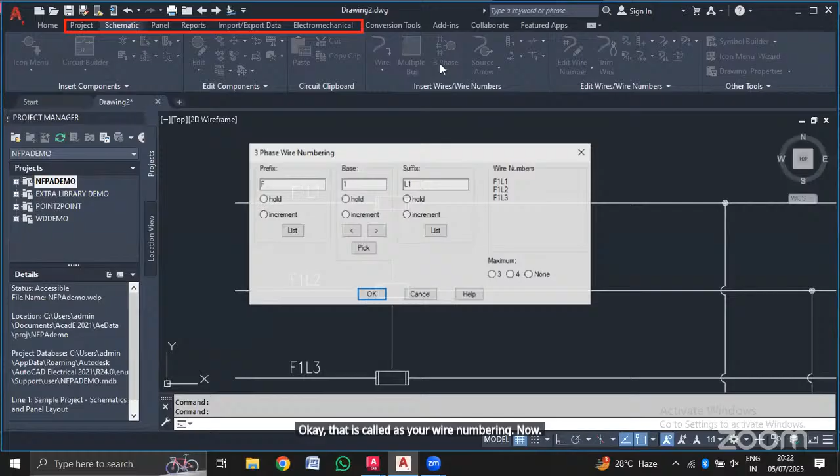Now, similarly, suppose I'll give you for breaker - so I'll make it as CB line 1, and then I'll make it here, line 1. Can you see it? It has been seen. Okay, CB line 2, line 3, right? And then if you want to add another one here, or you want the second side, you can see that you'll have it here. So when you're connecting it here respectively, you will see the ferrule numbers according to the requirement.

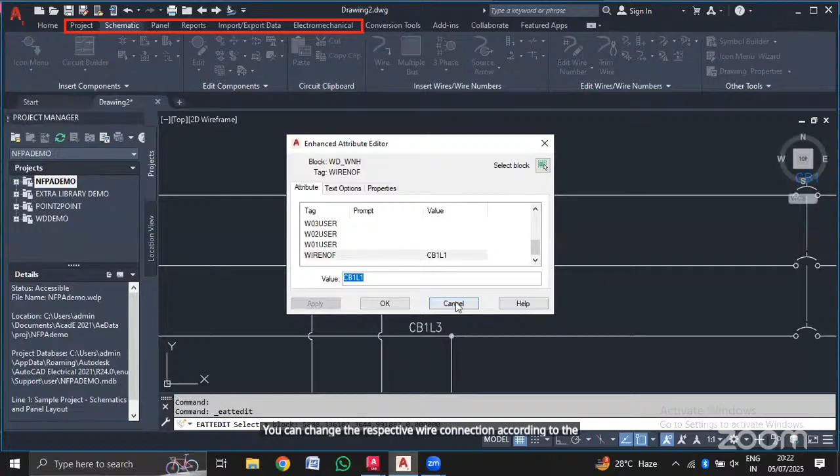You want to change it, double click on it. You can change the respective wire connection according to the requirement. If you have any wire connection to be changed separately, you can change that also. This schematic can also be given as in PLC drawings also in the later versions. You can consider those also as part of your schematic.

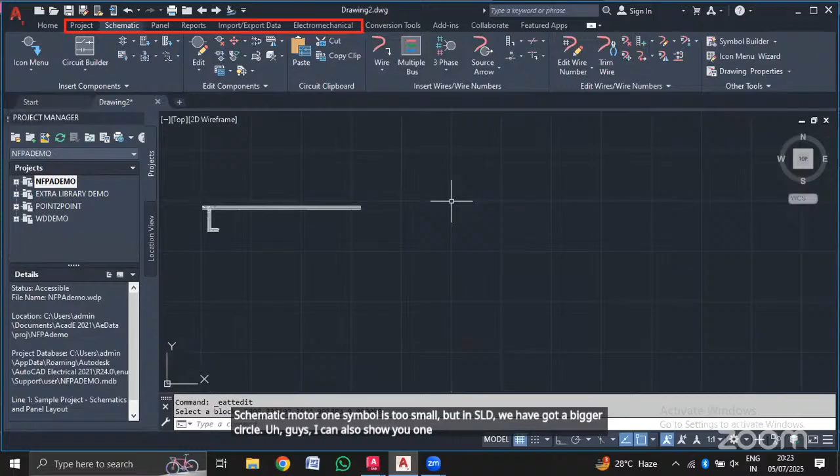Motor one symbol is too small, but in SLD we have got a bigger circle. Guys, I can also show you one more thing where we can directly draw using circuit builder, which is called a circuit builder - I'll just show you. And yesterday we have seen a vertical three-phase motor supply. Let us insert that and show you here.

The same thing which we have drawn is seen here. Can you see it? Automatically, the one which Manjunath taught you yesterday is this only, guys. It is generating automatically, you can see it. The whole drawing has been done. Now you can give the names to it.

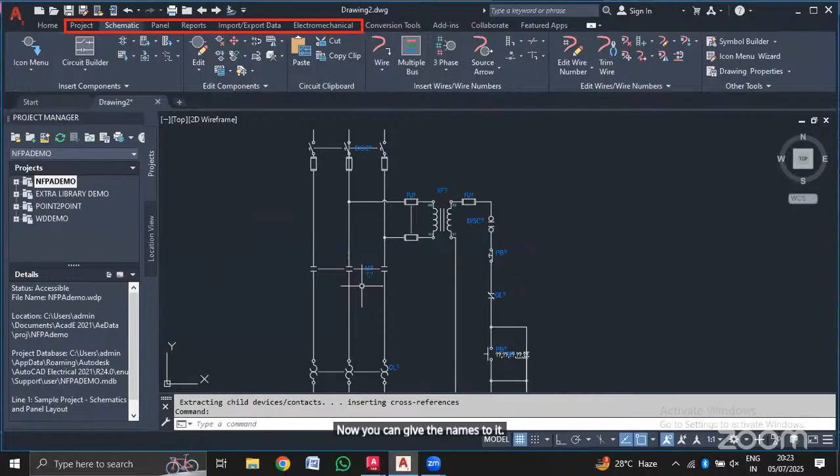Switch disconnector, contactor, overload relay, terminal block, and there's a switch for the motor, and then you have a motor rating. Now you can give the names. There's a control transformer you have drawn, and then fuses, disconnector, push buttons, overload relay, and different push buttons. So that is simply a circuit builder that you can design and edit to make your respective circuit work.

That's how you can use your ECAD application in a very detailed way, only to draw specially the schematics and understand it in a better way.

Are we all clear, guys? Any questions in this?

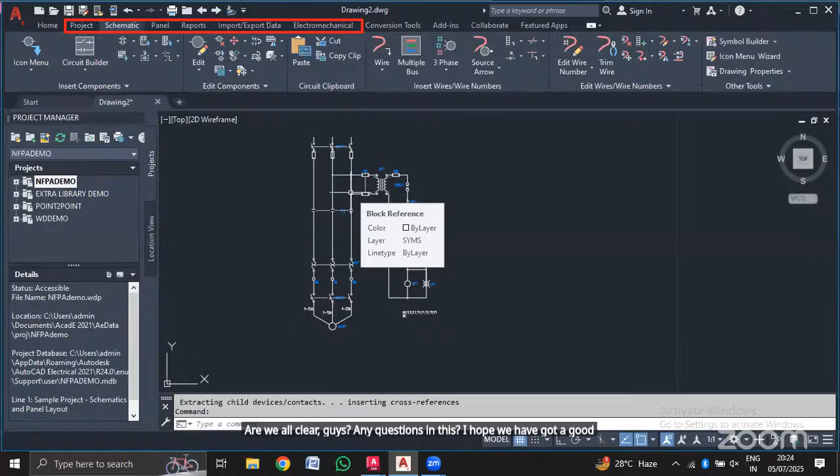I hope we have got a good understanding of drawing a schematic in normal CAD, and it took us almost 2 hours, 1.5 hours. Now we are talking about a schematic drawn at just a fingertip, in just 2 to 3 seconds, right? So this is something which we see as a very different manner in terms of your building construction.

If you want to draw a separate segment like this, you can draw it on your own also, if you have a clear picture of how this has to be done. Else, you can also draw it in a simple fashion. That's how your AutoCAD Electrical, or ECAD, will help engineers make their work faster and build accurate, precision-wise good schematics and schemas, to make sure it is error free while implementing in real time, guys.